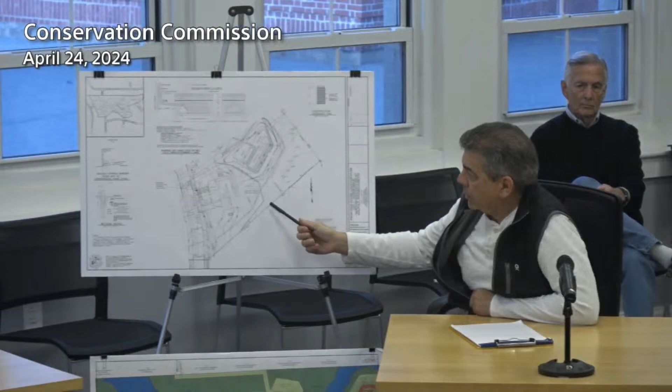So this is Lot 1. We did an RDA on this, and the reason being you can see the wetlands out in the back here. There's a drainage basin for the subdivision on the back of this lot with an easement, and the 100-foot buffer comes up through the basin and around the backyard. The house is outside the 100-foot buffer. This is the proposed dwelling, with the driveway out the front showing a riprap entrance for the construction entrance. There's very little activity back here, and some of this will be cleared when they build the actual basin, so I felt an RDA on this one was sufficient.

We have some roof recharge shown, sized for 1 inch of runoff over the roof area, which is just over 2,500 square feet—a pretty sizable footprint. These are all 35 by 72 boxes, so anything outside of that would require coming back for an amendment, a new notice of intent, or a new RDA. When speaking with the developer, we felt that box was sufficient to fit most of the houses they would consider building. It's all serviced by town water and town sewer.

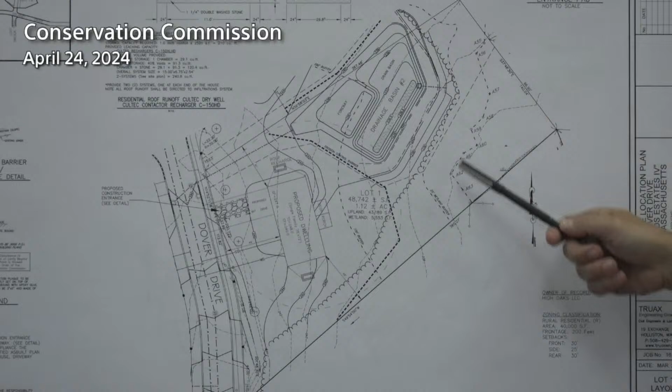There's really not much going on. Obviously there'll be some clearing already done before they get to this lot for the roadway, and like I said, we do have the basin back here. We show the erosion control. The one thing I didn't show is wetland bounds, only because we're putting them in for the subdivision around the basin—I don't actually have them on here. I don't know if you wanted to see anything else, maybe up in here, I'm not sure, but I really didn't show any on this particular site.

But that's pretty much it. Pretty quick overview. Okay, Dennis?

Yeah, I just have a couple recommendations to probably put on the plan, and these will repeat throughout for some of the talks. I think a note on the plan near the basin, stating that the operation and maintenance plan for Basin 2 is covered under the order of conditions for Northwoods Estates, DEP number 315-1261, so that if it gets pulled for some reason, that information is on the plan.

We'll put it right out in this general area—a note somewhere on the plan—for the O&M maintenance plan for the subdivision, Northwoods Estates, covered under DEP 1261. I can email you the links. That would be perfect if you did email me the language.

And then I'd like to see a note, or have it on the plan, that erosion control shall be established in front of the lot after grading until the site is stabilized. I just noticed with subdivisions there's a time period when the loam is down prior to it being stabilized, and it kind of washes off.

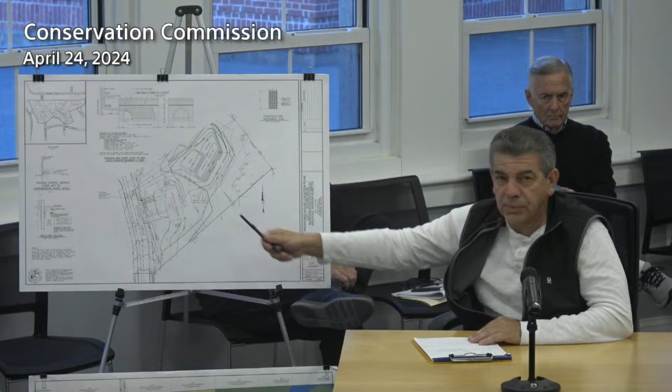I'll look and see what's on the subdivision plan, and if there's nothing coming up here, I'll put some more up here. Even if it's on the subdivision plan, I would put it on this plan too. Show it on this plan also. They should be on the plan that covers the lot. Oh yeah, okay.

Other than that, I would recommend the dash-4. For work in the buffer zone, I can't remember the exact language, but I don't know if it's new or not. The work is within the buffer zone and will not require a notice of intent unless needed, something like that. I don't have the exact language.

I don't think I've ever heard anyone say a dash-4. I usually use 1, 2, or 3, but I was reading it the other day and it sounded like it applied. If there's wetlands on a lot but you're not working within the buffer zone, that's applicable, but further activity down the road could require filing a notice of intent. So that's what the 4 is for.

Medio asked: the drainage basin, is there going to be any sort of fencing or something needed? We're not fencing them in, no. They're open, there's no fall, they're not very deep. I think this one goes from about 236.5 to 243.5, so the water depth, even in a 100-year storm, will only be 2.5 feet.

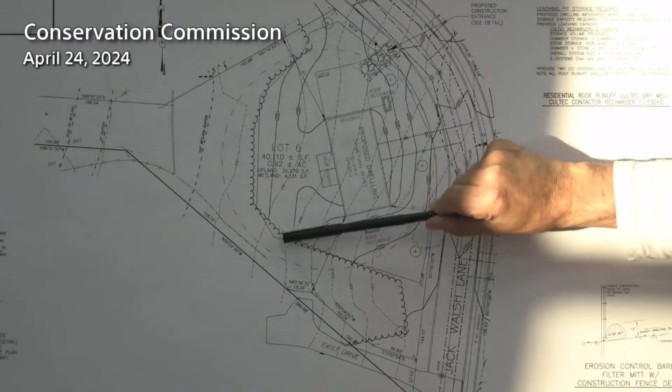Yeah, the wetland has a 25-foot buffer. This is the 100-foot buffer. And this is actually the limit of work that we're showing on the plan, so there's no work within the 100-foot buffer.

Be pretty far out there, over 100 feet from the edge of clearing until you hit any bounds. They'd have to really push the limit to get out there and do disturbance. And the lot does narrow back there, it's a real narrow strip that goes back, 50 feet wide.

And there's a stone wall right here on the site. Probably remember there's a stone wall kind of just after the 100-foot buffer. So most people probably living there will think that wall is some type of demarcation.

Questions, anything else? Okay, Landis? So none of the work is in the buffer zone, all of it is outside the buffer zone. There are wetlands on the lot way far to the rear, and it's pretty thick wooded between - well, not thick, not like underbrush thick, you can walk through there pretty easily. Right, I think in my report I just kind of questioned if the commission wanted to put bounds out there.

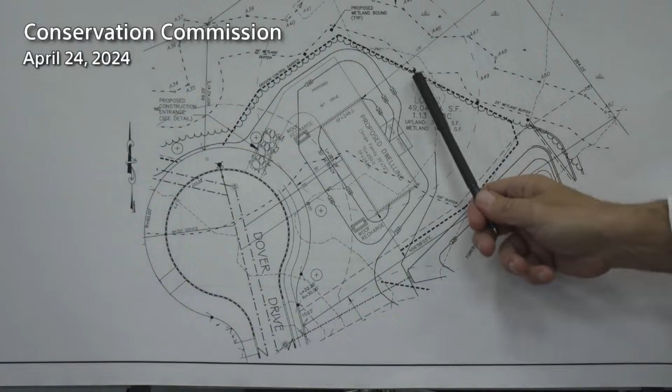Wetlands along the back. This is the 25-foot no disturb, kind of meandering along the erosion control line. We've got some bounds going all along the back side here along the 25-foot buffer.

I did run the erosion control up along to protect the drainage basin, because my assumption is that by the time they build this house, this will be all built and vegetated, so we want to protect that from erosion going down into the basin.

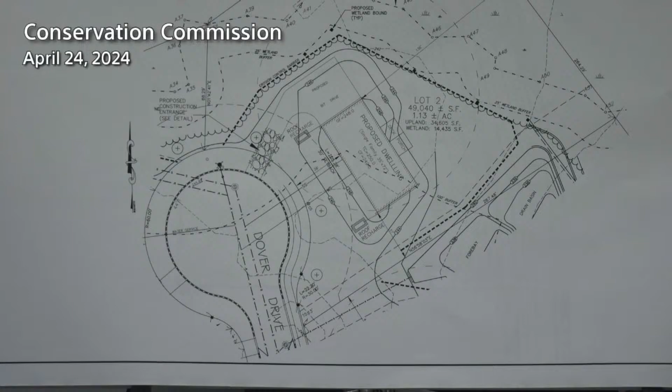That's pretty much it. We have the recharge system for the roof, it's in the front yard. Each house, we basically split the recharge system into 2 systems, one on each end of the house to simplify it. And again, that's sized for 1 inch of runoff over the impervious roof area.

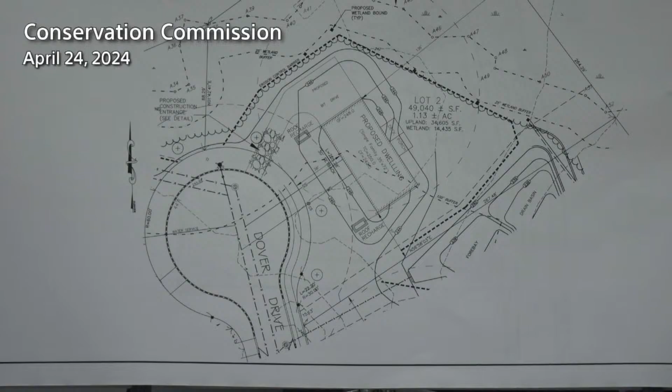And that's pretty much a summary of what's going on. I can answer some questions. Okay, Landis? I didn't have any specific comments related to this lot.

Do we need anything in the report on this that will show that this will handle the 1-inch? Right, so where is that going? Under lot 2 are recommended conditions for all the lots that are notice of intent. Okay, so you want me to go over them now? We can do them for all the lots at once.

So other than the boilerplate we usually put in: the soils at the roof runoff units shall be confirmed to the Conservation Commission to be sufficient to infiltrate the first 1 inch from the roof drainage. I know you have the specs on the plan, but we want to make sure the soils can also take the infiltration. So that needs to be evaluated during construction. You can come out and witness it while we're building. Okay, yep, that's fine.

Roof drainage units shall be located 2 feet above the groundwater and maintained in perpetuity. I think you have it at 12 inches. You don't state on the plan that it's above groundwater because I don't have any testing there, but the water table in this area was very high, like 24, 30 inches. That's why I did the shallow chambers. If you look, those are only 18-inch deep chambers. I did the shallow ones because of that. I didn't do the deep ones.

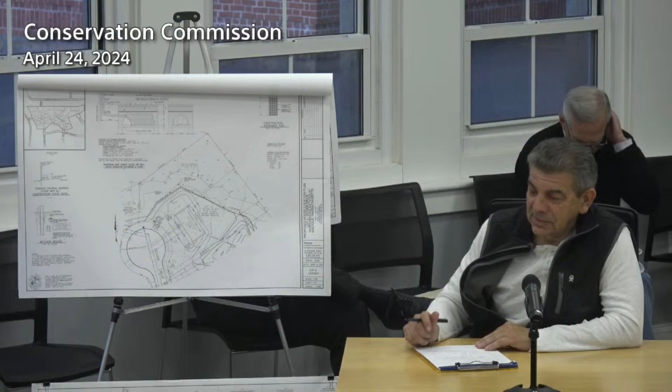Doug, you mentioned the other house was connected to the town sewer. Yeah, this is too. So no septic systems involved - no septics on any of these lots. They're all town sewer, town water.

All right, that's it. Media? No questions? Al? No questions. That's it? No comment. Anyone in the audience have any questions or comments?

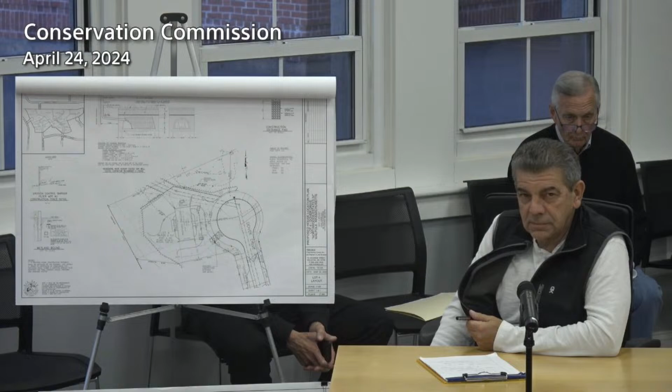Where is Lot 4 on your locus map? So you come up Dover Drive, it's the one on the left. Okay, look at your locus map. Yeah, actually you got the wrong locus map, I guess. That one up there? Oh, you know what - ours is cut off. That's that white strip, can't see it. White line went through yours, you don't have a Lot 4? No, that's the ghost - so we're...

All right, what is that, all? So you don't even have the bounds. Okay, yeah, all right. This is all gone? Yeah, that's crazy, I know, I'm trying to draw it in. Like, I think it's like this. We'll give you all new ones for the file. You got them in email, they must look better on the email.

I was doing the review, looking at the email, and then I started looking at the plans, and something is missing here. These are the ones from the email, no wait, yeah, these ones. Right, yeah, it was the copying, the copy machine.

So you didn't have any other comments? Same, no other comments apply to this particular one. Okay, Bailey?

Broken record, but feeding off your comments, I'd recommend some more bounds at the property lines. There's gonna be one right here. Yeah, I was putting it on the plan, and one on the other side as well, going up here. Where am I? Oh, over here, somewhere. Perfect, that's it, thank you.

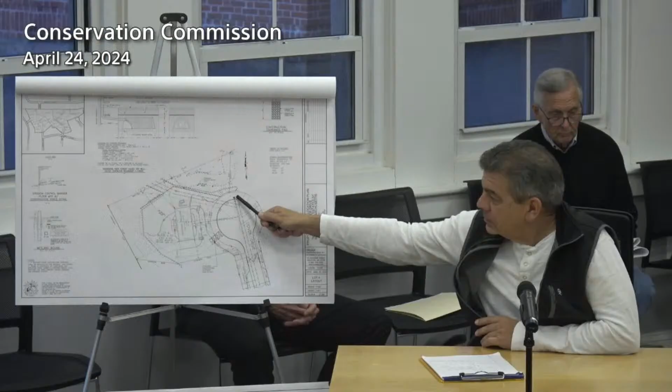Right there, yep. Are there storm drains on the street? They're down here more, this is all flowing this way. So if the fire department was flushing the hydrant, it would flow toward the storm drain, away from the wetlands, correct? Okay, yep, that was my only question.

Media? Nothing. Al? No. Betsy? No. Anyone in the audience have any questions or comments, please identify yourself for the record. This is lot 4.

Okay, so we'll make a motion to close the hearing. So moved. Second. All in favor? Aye.

And the order, as we stated before, with the bounds added as noted in discussion.

Anybody have anything else? So we'll make a motion for the notice. Want to make a motion now? So moved. Second. All in favor? Aye. Okay, this is lot 4, whether it shows up or not.

All your plans are like that, everyone? Yeah. That's crazy, didn't even notice that when we printed them, I guess you make so many copies you don't even notice. No, look, I don't think I did this one right.

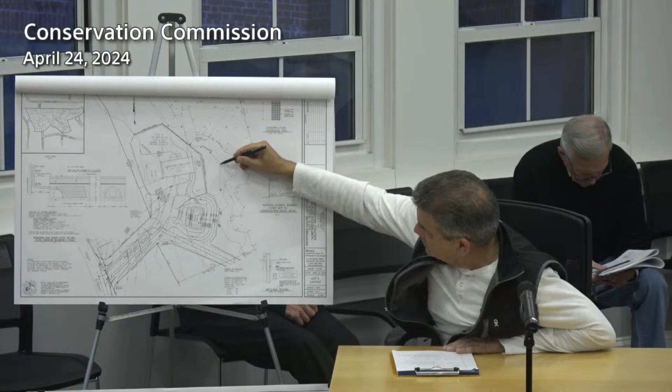The one right there? Where's the, another one up here? Where do you want it, Landis? Like intersect this, where? Like a straight line, where Landis shown? I can't, yeah, well, all right, he's far away. I think like somewhere around one in here, okay. Just one? Right, yeah, coming over.

We're back down to the one you've already got there, I got a 22 flag. All right, so one there, you wanna go out there, we'll put one, just come straight across. Yeah, I think we'll put one up here, then we've got one there. Okay, so that's, I was gonna straight line it like this and put it right out, so it intersects wherever, roughly, we want it in, as long as it's inside the 20, as long as it's on the uphill side of the 25-foot no disturb.

Sure, no, I'm good with that. Like 1, 2, put it right here. 3 more plaques. So we got 1, 2, 3, 4, including the corner property line, which is already shown on one of the other plans, so.

What about going north? Now, what do we got up here? And we'll go way back. I don't show the whole lot. Yeah, I would think another one. Is that property line off this plan? Yeah, it is, I think it is. Well, just put one.

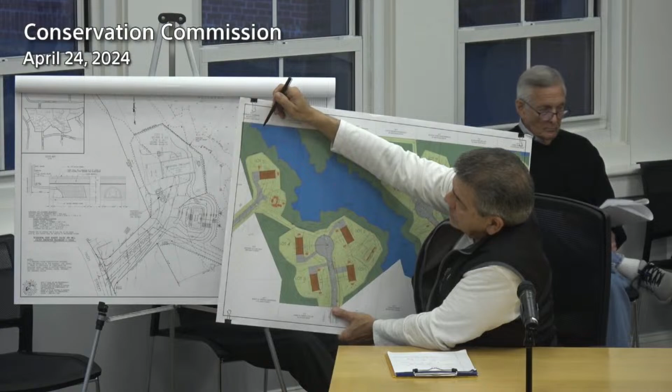You wanna go up just one more, or? It goes up, yeah, this is the lot, so it goes way up here. Okay, but the wetlands up there. Just put one up, near where the border of the plant here is. Yeah, up in there, okay.

All right? And we don't have anything on the west side, okay? I'm gonna start selling. So that's, we've got the plaques in, all right. Anything else, Landis? No, I don't have any other additional comments.

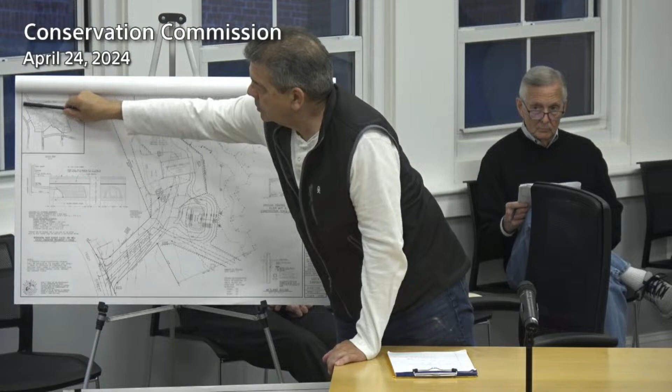Okay, Bailey? What's back up in there? Woods. Just woods? But, well, there's houses on High Street, their backyards come down towards that. I can't really show you on this, but this is a lot here, over here, so these are all houses up here, and this house is along here. This is all developed, those are all houses. Okay, thank you, that's it. Yeah, it goes all the way up to Homewood. So these are all built, these houses. I think this is their backyard where the wetland starts.

Anything else? No questions from the board. We'd please ask anyone from the audience to use the microphone, sign in, and identify themselves.

I'm Bob Scrant, 483 High Street. My question is about the driveway - what's the width of the driveway coming from High Street? It's at least 20 feet, the fire department required at least 20. We tried to make it only like 12 to 14.

At the planning board it was originally 75 feet, and I protested that and asked for nothing more than 25, but I never heard what the final plan is. So what is the plan? I think it's 20 feet, the fire department minimum requirement. That's my only concern.

Good luck building in that swamp. It is a swamp out there, it's wet - this year it's really wet.

On that road, is that covered under the subdivision plan? Yes, this section of Road A. Will that be done to the end? See this bubble - that's the actual road. It's kind of like a paper street, so that's the right of way. That'll be a private way, it won't be accepted by the town.

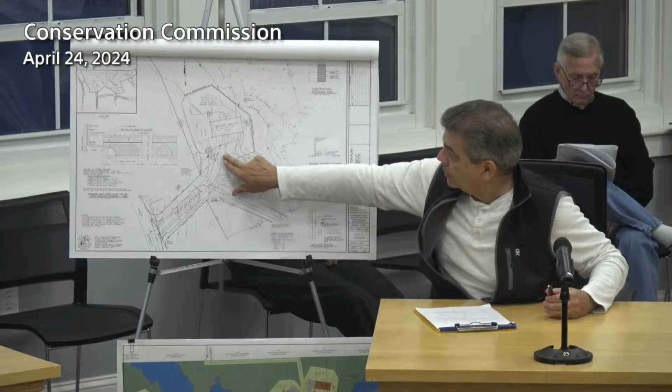There will be a private way there. This is the lot line - that's our frontage for this lot. It comes around the bubble, see it?

The road construction and stormwater are under a separate notice of intent and land disturbance permit. So that's covered as far as how that's gonna be done. We don't need another construction entrance - there's one for the High Street subdivision already on the plan.

So whose lot is the drainage basin on then? It's in the right of way, but it's also on lot 5. They'll be responsible because they're gonna own the road - it's gonna be a private way, so whoever buys this lot gets the rights to this road as well, they'll own it all.

The town's not gonna accept that as a road, ever. That was the deal - we made it smaller, no turnaround, just a hammerhead right here, and he gave up a lot to do that. He thought it was advantageous, I don't know.

So you're gonna build this as part of the subdivision, and then it becomes part of lot 5. Lot 5 will also own that road, but it's also an easement - the town will get an easement for the water and sewer. They'll get an easement over the road for the water and sewer.

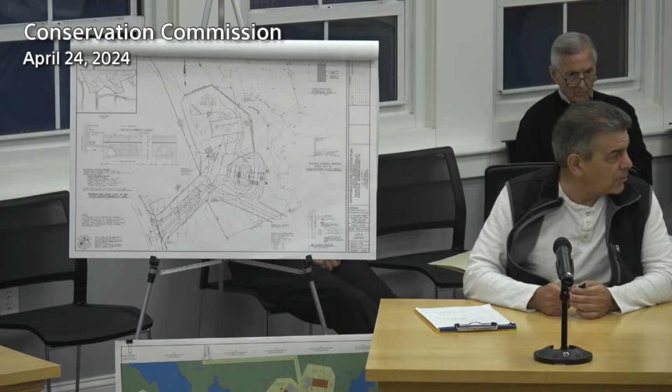Thank you. Can someone make a motion to close the hearing? I'll move. Second. All in favor? Aye. And approve the order of conditions as noted. I'll make that motion. So move. Second. All in favor? Aye.

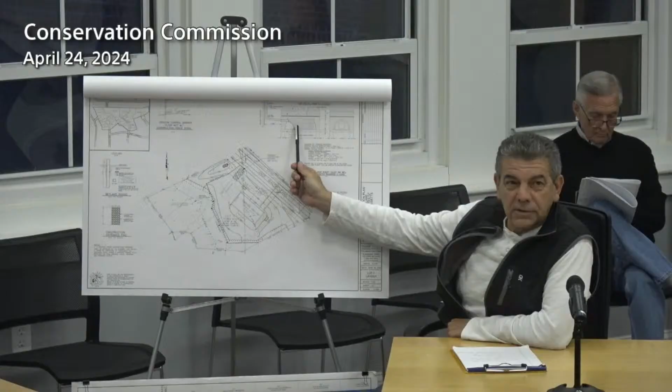I just realized when I was looking, I would include on your plan a note that the culvert should be kept free and clear. Like an O&M thing, same kind of note. Where is the culvert?

This is the area here to the north, the oblong area where the riprap is. That's where we wanted the culvert underneath the road, because when I was out there during the delineation, there was a lot of bleeding occurring at the rock wall on the other side.

So this homeowner should just know that culvert needs to be kept free and clear. I don't remember what language was in the O&M, if any, but I'll put it right on the plan that this culvert needs to be kept free and clear. That should reference the order of conditions.

Do you give individual O&Ms for each lot? With the recharge systems, like gutter cleaning and all, like I normally do, the standard one. Would that be in the notice of intent, in one of the individual filings? You have one of the full notices there?

Note 1: a stone construction entrance shall be installed at roadway, see detail. Number 2: certificate of compliance. Anything else you want to know? No, I've got all the words there, I can read them.

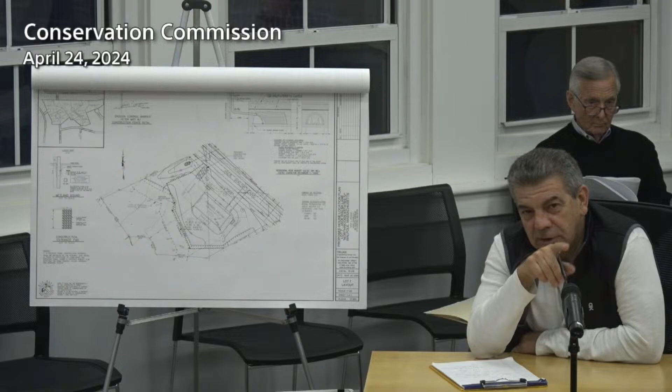In some of these individual lots I put a small O&M in, like a one-pager. I don't remember exactly, but it has gutter cleaning and maintaining the recharge systems. I remember seeing that. Can you put that as a note on the plans?

No, I can give it to you for each one. It's boilerplate, but I can add something specific, like on this one and the one with the drainage basins, we can add that in there as well. And those should be given to the homeowners when they buy the lot.

Why don't we back up to the other ones we already did and put that in? So I'm going to give you an O&M for the homeowners, for the infiltration units. I'm surprised I didn't do that already. Usually it's just gutter cleaning for infiltration systems, that's pretty much it.

But on one like this, lot 7, I can add maintaining the culvert. And on the other one that has a detention basin, I can say you're responsible for the maintenance of the detention basin. We could put a condition that homeowners shall follow the O&M plan for each lot.

I'd probably put that in the subdivision notice of intent, because I've done that on subdivisions before — one for the subdivision, one for the homeowners. Okay, why don't we add it as a condition and you can give me that copy we can reference.

When you make note here about the culvert, just label what it is on the plan, so that somebody looking at it knows what it is, other than just you. Yes, I agree.

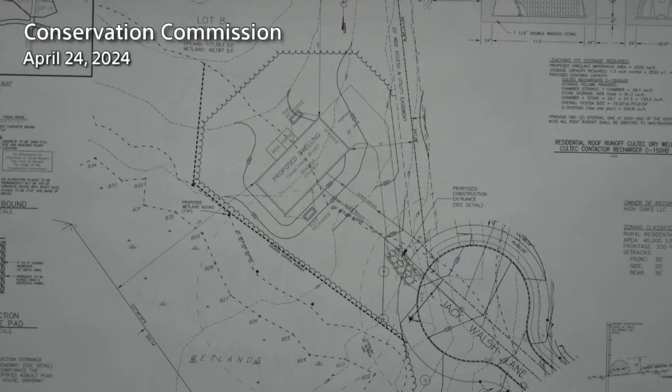I didn't run the bounds all the way out the back. My thought process was, if they go beyond what we're clearing, you're going to probably have some filing in here again, and you're going to require them to run the bounds out the back at that point. If they want to build a barn, a big shed, a big garage, I think they'd be back in front of you for a notice of intent, or at least an RDA, at the very least. So, that's it.

Any questions? Okay, Landis? Yeah, so the limit of clearing to the rear is just at the little squiggly tree line that you have on there? Correct.

And your erosion control just meets the 100 buffer zone because it's aligned to intersect, more or less. Yeah, I just brought it up the hill. I would maybe just hook it around - is that going uphill? It's all going uphill, it's all sloping this way. I just ran it up to the buffer in the woods.

So you might just want to hook it around rather than run the erosion control into the woods that you're not going to be clearing according to this plan. Yeah, I can just do that so it's clear. You want to move this over to here? Yeah, so that'll go here. Okay.

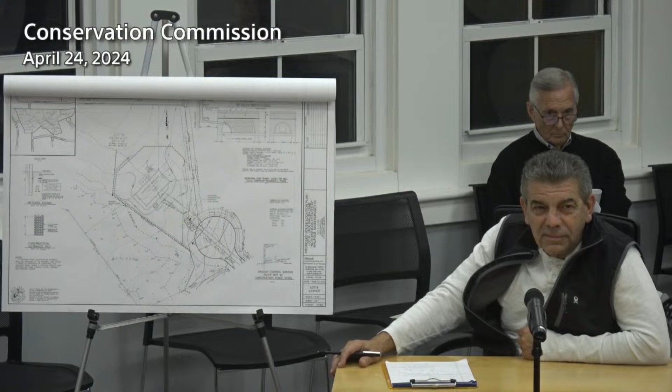Yeah, I think this lot will come back. I mean, they're going to put it out there more or less where it makes sense, but I think this lot will come back, probably with a sports court or something. I can't imagine - I wouldn't buy all that land not to use it.

I think we should, as a condition, require that any development back here will require a filing. Yeah, we have the boilerplate - any additional activity would require a filing, that's pretty standard. All right, that's standard. It's in there as a condition.

Anything else? No, I think that was it. Okay, now.

Those are not plaques. Another plaque down on the south side here. Hey, you took it away from Bailey. He's already stealing my thunder, Al.

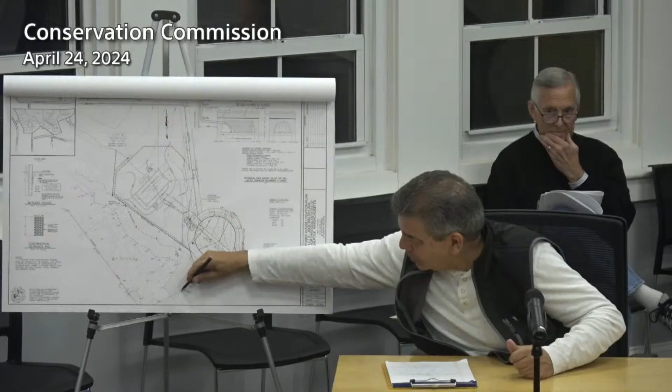Come on, Al, okay. Bailey, where would you and Al like the plaques? Exactly where Al said, please. All right, we've got them all trained. I would say two more plaques on the south, one at the property line. Yeah, I got one, we're going to have one here from the other lot. Okay, well, we'll show it on this one as well. And then one where it makes the bend, someplace in that bend.

Now, do we want to - Bailey, you want to extend any to the west? Not at this time, thank you. Rob's going to order like 100 at this point, so I'm good.

But that's just my - I think it'll come back. Could he put one more out there? Sure, but he's not doing work out there. If you're thinking that this is going to be developed, I think we ought to at least put another plaque out there somewhere. I'll put one more if you want, right here at this little bump, where it jumps out and comes around. Okay, at the westerly end of that bump? Yeah, I'll put one more.

I mean, I do think if someone's buying this lot, they're buying it because of the size of it, and they're going to want to do more. Like you said, they're going to have a sports court or something. Okay, anything else, Bailey? Nope, all set, thank you.

Doug? I'm set. Edie? Al? Okay. Betsy? No comment. Anyone in the audience have any questions or comments, please identify yourself for the record.

Hearing none, so I'll make a motion to close the hearing. So move. Second. All in favor? Aye. 6-0. Order conditions as noted.

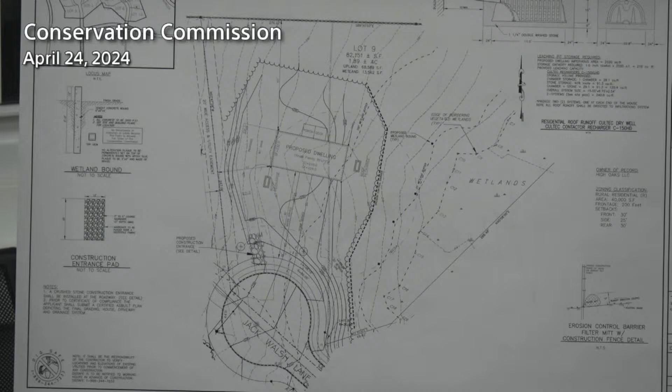So, Landis, I'm recommending a couple more bounds, at least one more. Put one on the corner, on the property line. Wait, which end, south end? C19, down here? Yeah. Right here? Yeah, okay, that's the 25, at the property line.

Where do you want, Bailey? We're not to me yet, it's not my turn. What do we got over here?

Up in there, it gets into the wetlands already, it's in. Okay, Bailey, was there any additional bounds that you would like to see, or anything else?

I could maybe do one more, at the corner at the top, and then it kind of curves in. So maybe up in that area, across from flag C7 -- Landis, see what that is? Yeah, in there, is that all right? C7, okay.

I actually have a question, because there's what looks to be a bound down kind of in the road -- what are they called? Road bounds? Yeah, those are the road bounds. Oh, that is a bound, just not the wetland ones.

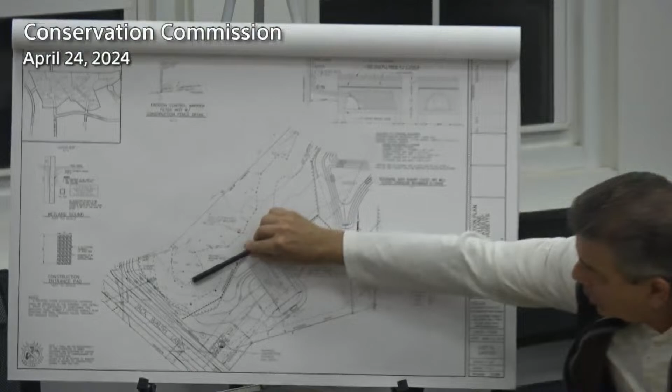Anyway, this is a lot coming in. The house sits pretty far back off the street because it opens up back here. The wetlands are up in the front, all the way along the westerly side of the lot. So we're coming in on the right-hand side, front entrance garage, recharge on either end. There's a drain line that comes down along the right-hand property line, and that goes out to the drainage basin out in the back.

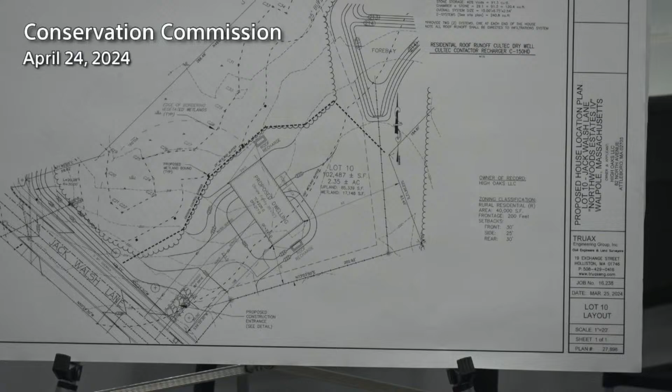We do protect that with erosion controls, because it will be built by the time they build the house. Then we have the 25-foot buffer, we have the bounds along the left side, and the limit of work along the left-hand side of the lot. Water and sewer out to the street. And the 100-foot buffer kind of goes right through the house, eating up most of that lot. Pretty much it.

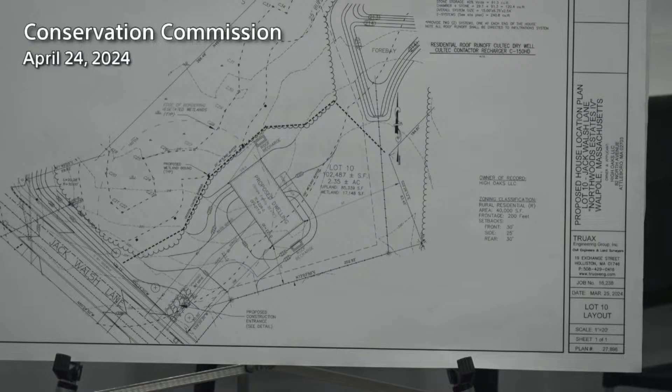So my notes are, again, the operation and maintenance plan for basin, question mark, is covered under the order of conditions for Northwoods Estates, so that should be noted again. And the basin should be labeled with its number, so that we can correspond it to the subdivision plan and the O and M. Yep.

Okay, Bailey, I wouldn't mind seeing a couple more bounds on the roadside, just because some people like to maintain the front of their property, and knowing where they shouldn't go beyond makes some sense to me. Oh, you want one down here? Yeah, because that's the road, right? Yeah. I just didn't think anyone would go down there.

Well, is it going to be cleared, or grass? Yeah, it's just a 3-to-1 slope off the street, drops about 6 to 8 feet. These are all contours, so it goes down 2, 4, 6, 8 feet. So people won't be planting tulips or whatever there. No, just the town, when they need to clean out that culvert. When they go down there to clean it, they're going to see the bounds and respect them. They won't go near them, and they won't clear the slope if they see the bounds.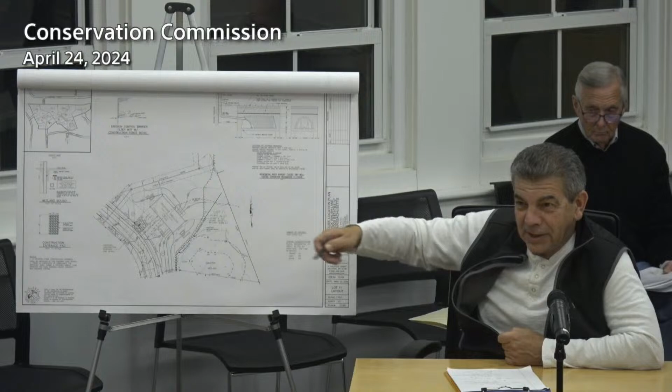So, all right, you put in 3. Yes. Where's your third? I got one in the middle. Oh, I went on either side of the wall instead of one in the middle. I was getting instructions from the other end of the table - I had a few people over here going with that one, so. Okay, so we have 3, 1, 2, 3, okay, 3 bounds.

We're surrounding it. Anything else, Bailey? No. Doug? I'm good. Emilio? Al? No. Betsy? No.

Okay, anyone in the audience have any questions or comments? Please identify yourself for the record. I'm Rick Spellman, I live at 29 Delaney Drive, adjacent to parcel 12. I had a couple of questions. As I look at parcel 12, there are some comments here about temporary sediment basin. Should we actually do parcel 12 first? Well, we're on lot 11 right now. Sorry, did you have any comments on 11? No, I do not. Then why don't you sit there, because we'll be on 12 next. Save yourself getting up and down.

Okay, hearing none, someone make a motion to close the hearing? So moved. Second. All in favor? Aye. And now this is just an order under the bylaw. So someone make that a motion. So moved. Second. All in favor? Aye. Okay.

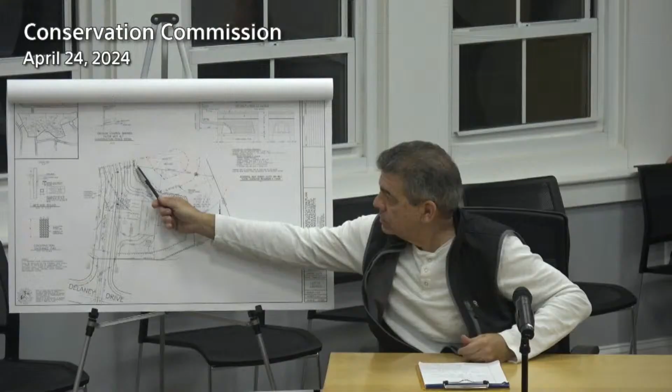Emilio? Al? I'm not seeing a property line on the north end here. This is it here, Al. This, right? Yeah. Oh, you didn't know what it was? Just there, okay, yeah, that's it up there, that's fine. Okay, Betsy? No.

Okay, had a question. On the erosion control, you're showing it in the woods. Is that practical to show it, or should it be along the tree line?

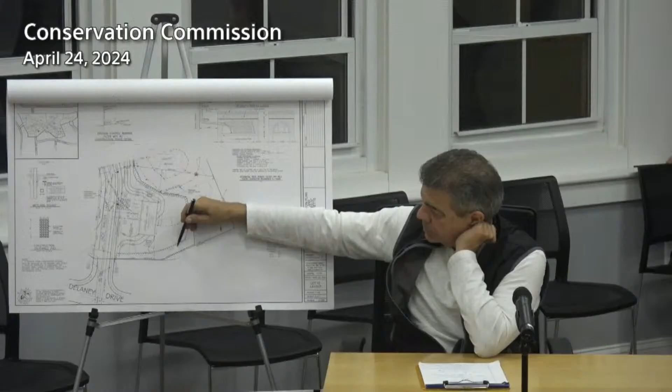You bring it up here more? Well, I just want to know, to get an erosion control line in there, what are they going to do to get there? It's a silt sock, so it's not thick out there per se, they could run it through there. I mean, I can bring it up. I'm actually thinking it should come all the way up to here, at the limit of work. I'm just thinking then it would be more the limit of work, so you leave the trees there. Do that. Yeah, okay.

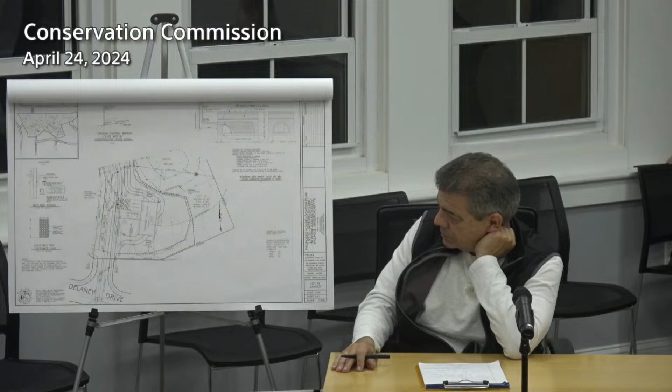Back to Al's comment, the property line is bold here and here, then it goes unbold up there. That's why he was confused - Al's seen billions of plans, so when he sees a thin line he notices it. This is the perimeter of the overall site, so it probably jumped out more than the interior lot lines.

Okay, so we're gonna move the erosion control and bring it all the way down to the road. There's a stone wall there, but we might as well come all the way up. I think we'd had that on there for the subdivision.

You got the subdivision plan in your hand, right? Actually, there is some on there for the subdivision. He's gonna go over that in a second, gentleman right here.

Anything else? So again, identify yourself for the record, please. Richard Spellman, 29 Delaney Drive.

That was my first issue here, is the temporary sediment basin. I don't see that anyplace else on the plan. I'm just curious what that is and how long that'll be there. So that's not on this plan, that's on the subdivision plans that he's looking at, because it's over in this area.

So there's a riprap entrance - the pavement ends here coming off Delaney, that was all built up to this guy's driveway on the left. So then you got the riprap entrance up to here, and then when we were going through the approvals, Carl asked me to put some type of sediment basin here, so if any water did come down and spill off the edge, it wouldn't roll towards his property.

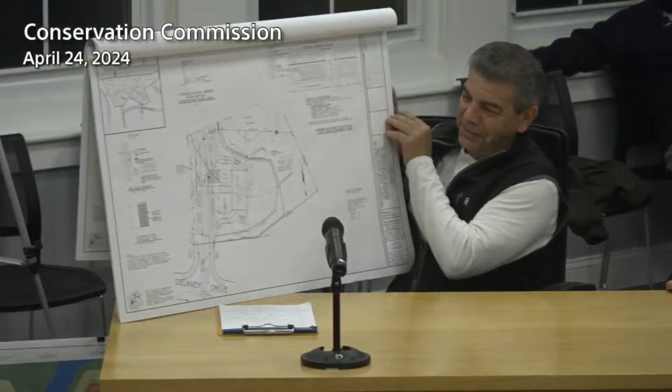Okay, so this is where the temporary basin is for the subdivision. And the hay bales for the subdivision come out here and go up like this and over somewhere in here to go around that basin.

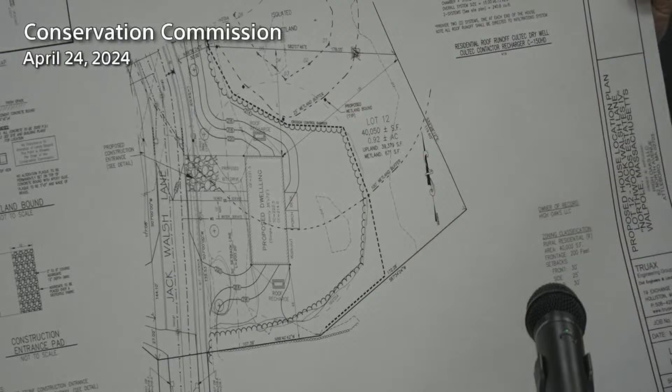So these hay bales are here already. So we're gonna extend it all the way down like this and bring it around that wetland when they build the house - not now, while they're building the road, until someone actually pulls a permit to build the house. Otherwise, the other erosion control will stay there until they're ready to build a house.

Yeah, I was gonna say, that's gonna be delayed, will it not? Correct, this could happen a year or two down the road. Who knows? Okay, very good, thank you.

The only other thing I wanted to mention - the last time I was here was maybe last year, and I related to you that I lived up in the seacoast in New Hampshire for a number of years and had a water problem in my basement. It took a significant amount of money to get it resolved. Subsequent to that, we moved back down here to Massachusetts, and I built this home with the builder and required him to raise the footings up 1.5 to 2 feet above what he normally would do. We also put in a French drain. So in the 24 years I've lived here, in an area obviously troubled with water, the way I see it, if I were shopping here today and saw someone put isolated water wetlands on the property, I wouldn't buy it, and I certainly wouldn't buy it adjacent to where I have to put a storm drain system in the back of my yard. I don't know why anybody would buy that, frankly.

So again, the homeowner is going to be responsible for that, so that's a real question mark in my mind, whether that's going to resolve the problem. But I think I'm okay. I just want to make sure this doesn't adversely affect what I've put money and effort into in a house that I've invested a lot of money into for 24 years.

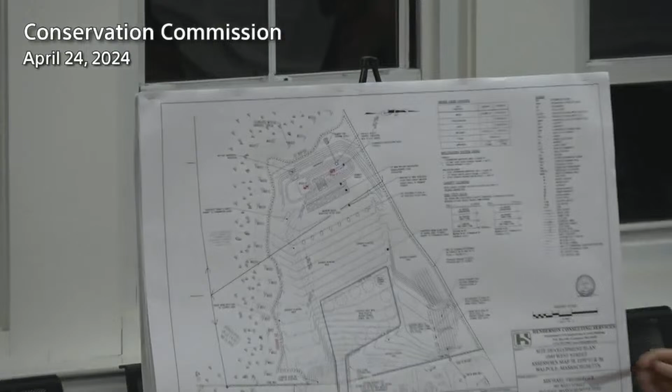The general scheme is about the same. East side of the site is access from the existing nursery. Excuse me, what sheet are you on? Oh, this is sheet 2 of 4, a zoomed-in sheet.

So overall design is generally the same. We have a stormwater basin at the far west end. I have updated calculations that were submitted to Carl. We had some back and forth, and those seem to be settled. So the design and stormwater management is sized to meet all applicable state and local standards.

I'm going to work backwards from the drain basin. We have a riprap infiltration trench upstream of our sediment forebay. Last time that was closer to our gravel storage area here. We flip-flopped that, put in a 50-foot wide vegetated filter strip, and we're calling for a barrier of boulders or stones or something like that to demarcate where the site operation ends and stormwater management begins. This was part of our discussion last time, separating those things and making sure that's maintained properly.

Carl and I talked about that when we were on site, and it made more sense to me after hearing input from both you and Carl to set it up this way.

So from that point back, we have what's called out now as a nursery planting area. The goal here is to use a good amount of this area for Mike to plant nursery stock, maintain it, harvest, ball it, and utilize it, then replant and continue that operation seasonally. So on the plan, left is the south side of our stockpile area, the west side, and the portion not occupied by the septic system will all be used for planting, maintaining, and growing nursery stock.

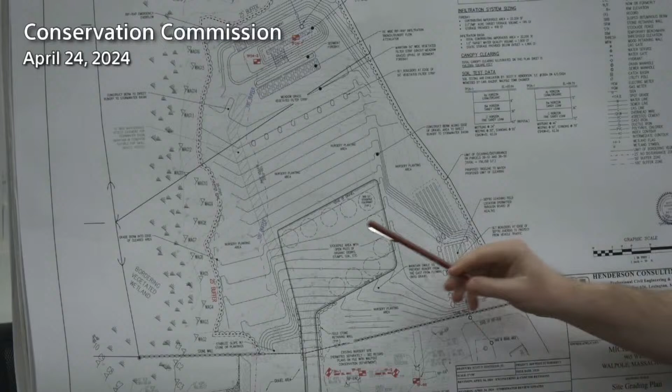Again, sort of marking out general soil stockpiles on here. The intent of that gravel pad is to just be maintained as strictly a gravel pad that Mike can move material as he needs, whether that's planting stock and nursery stock that he's just harvested and preparing to pack and move or sell, bringing in stumps and things like that that are processed into wood chips that are utilized, things like that. So there aren't going to be any structured, constructed storage bins like there are in the other part of the nursery.

This is merely an operational space that's stable enough to run equipment over it.

Other additions to the plan: there was a request to make sure that we put a barrier up between this operation and the septic system. That's been approved by the Board of Health, so we're going to use a similar thing, large boulders or the like. We still have some small stone retaining wall areas here. There's a detail on the last sheet of the site plan that shows that, a typical field stone wall, non-mortared.

You excavate out and compact the base and stack stones in a manner that allows you to keep that stable. The height of that wall is going to be minimized, somewhere between 3 and 5 feet at most, ideally under 4 feet wherever we can, so we don't have to produce a structural plan. And the grading indicates that.

See if there's anything else I missed. That was pretty much it. A lot of this was just adding more information and notation on the plans.

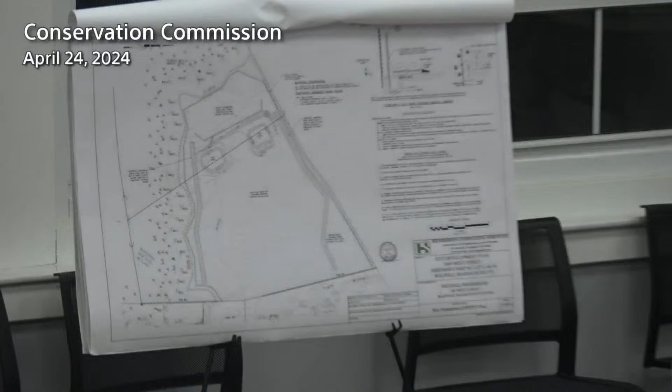I will switch to sheet 3, which is the site preparation plan. We are subject to a NPDES permit. We have an active NPDES construction general permit for the other site, and I have already expanded that to include this area in general, so we have that permit.

One of the things that Carl's initial review requested was that we show construction period sediment basins that can capture 1 inch of runoff from the disturbed area. So what you see here is a general thing. There's no sense in really producing detailed grading for construction period in here because it changes rapidly and frequently. But in general, you berm the edges of the site such that runoff is directed only to the west.

And then the existing topography and what will be proposed sort of splits as you get toward the permanent stormwater area, so we have 2 basins, one on either side. Those are just temporary depressions allowing runoff to collect there when the site's disturbed. During construction, that's adapted as needed, but this will be the first pursuit, to construct the site like this.

When it's cleared and grubbed, then initial grading happens after erosion controls are in. And we want to isolate the area of the permanent stormwater basin, which is why these are located upstream of that, so that we can construct that permanent basin and stabilize everything before you discharge runoff to it.

There's a construction sequence on this plan, and I did just send an updated set of plans today to Landis, so that's what I'm referencing here. The only changes since the initial set was submitted on Monday are the few things that Carl had asked for from a drainage perspective, some updates and details and things like that, so just so you're aware. The details, yeah, the construction detail for the stormwater basin.

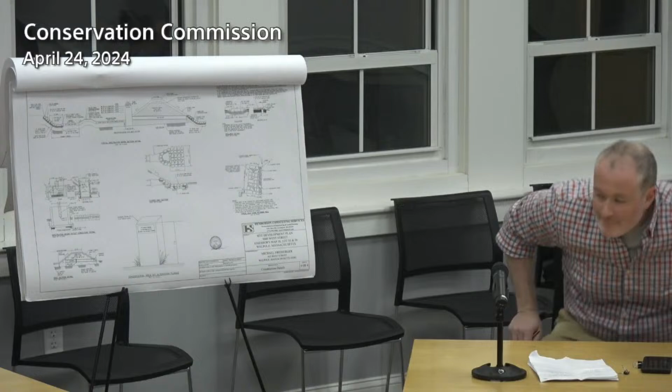So I think Scott did a really thorough job with revising the plans and giving direction of construction, stormwater management to follow, and areas that'll be planted and areas that are for stockpiling. It makes a lot of sense. So that's the redesign of the infiltration basin.

So I provided, so the commission hadn't really seen our boilerplate order or anything for a while, so I put in your packets the recommended order of conditions, which includes boilerplates, and then towards the end, some special conditions pertaining specifically to this site.

One of the things I was thinking about when I was writing this is, one, that we generally limit fertilizers, herbicides, and pesticides in the buffer zone, so the planting areas in the buffer zone would be restricted to that.

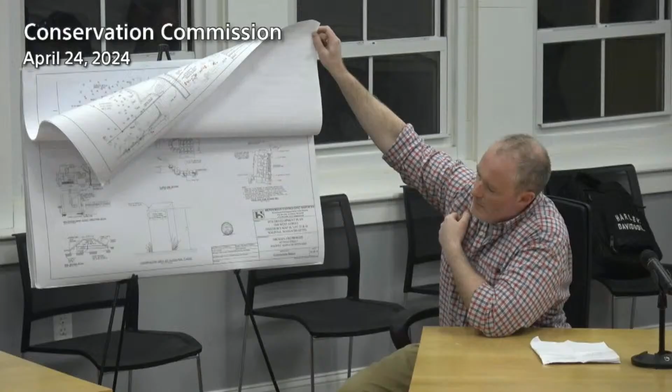And just called for them every 25 feet along that 25-foot no disturb buffer or limit of clearing. Do you want us to show them graphically, so that you can make sure, just squares, add them? Okay, alright, I can do that.

Awesome. And I don't know if we ever talked about it, but just understanding that there's the nursery planting area that borders the 25-foot, within the 100-foot. Are you gonna have like tractors and machinery planting, pulling out plants, or is that all hand done?

Yeah, we use the ball. Usually it's like a spade truck that would come down if it's something bigger. It almost has like a cone shape to it, drops in and picks it up and takes it out. Can you plant smaller stuff within the 100-foot buffer and the bigger stuff outside? Yeah, it just depends on how long you want it to grow and mature before you pull it out.

We could condition that, so not to interrupt, but this area in the 100-foot buffer, it's just this left side. It would be fair to say that you could limit what's grown and harvested in there to not require large equipment to pull it out, because there's so much other area you could put those larger plants. Okay, I was thinking...

If you did want to bring machinery in there, maybe there's more of a physical barrier you could put along that 25-foot buffer so the tractors and things don't accidentally go into the wetlands. But I'm open to, like, a split rail fence or something like that. Yeah, I mean, something. We're gonna maybe do like arborvitaes or something to plant that line.

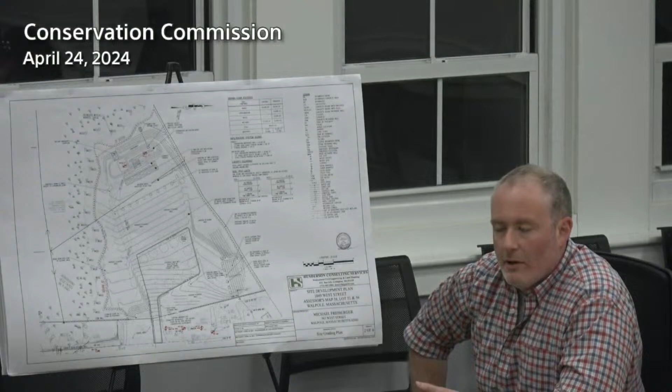But right above the septic field, is that a second septic field? What is that? It's a reserve area, right? So when we design a septic system, you have to have a primary and a reserve. A lot of times you may see a configuration where there are trenches and you alternate, primary, reserve. We didn't do that in this case. So I have it here sort of as a reminder, but it's not being built.

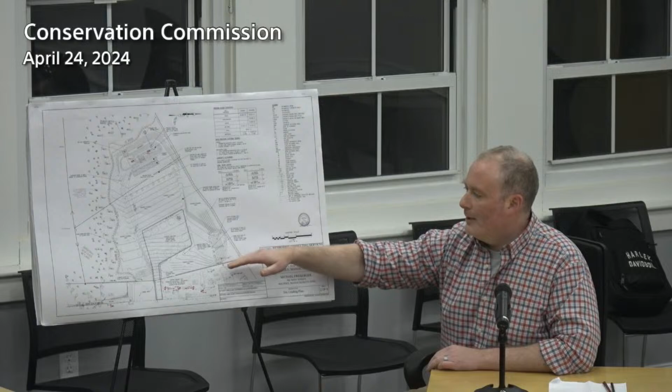Nothing will be built in there. If this ever failed, this is the secondary expansion area, not replacement, right? So it's only if this stops working that we have a second spot that it will work. So we're only protecting what we're constructing. Sure, I understand. Thank you, that's it.

Emilio? When's the proposed start and finish for this project? As soon as we have the permit, I think Mike's ready to go. So it's imminent and ideally completed through the summer season. It shouldn't take that long, so. All right, thank you, that's all.

Al? First question, what is the water supply for this property? It's a well. There's 2 wells. Where is the well? It's on the other land. I don't have it shown here, but there's a well just behind the building. That's your potable one, right? Yep, that's the potable drinking well that serves water to the structure. On this side, there's a second well, and that's an irrigation, a sole irrigation well.

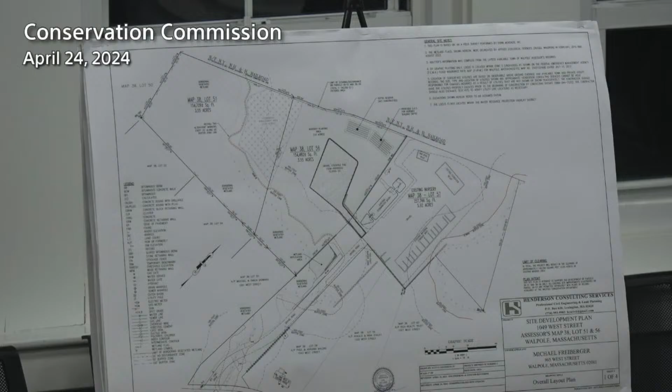Okay, so that's our water supply. All the infrastructure for this is sort of within the purview of the old permit. Okay, so now, since you have well water, and you're gonna be disturbing a large piece of property, my only concern is that if we change the weather pattern that we've been having all winter, and now we get a dry spell, does that well have capacity enough to wet down the place so that you don't generate a dust storm?

So, two answers to that question. That irrigation well has a fairly significant draw. The flow rate up there was, I think, over 10 gallons a minute, which is sizable. 20, when you fracked it. The intent of planting this area so that we have meadow grasses that are left to grow, that are stable, is to stabilize the area so it's not a dust bowl. During construction, we're obliged to have, if needed, water trucks available. If we don't have enough water drawn from the well, we will have dust control provisions on site during construction.

That's my concern, that we could have the other extreme like we had recently, where things get very dry, and I don't want to see a dust bowl here. Understood. Okay, that's all I have, Jack.

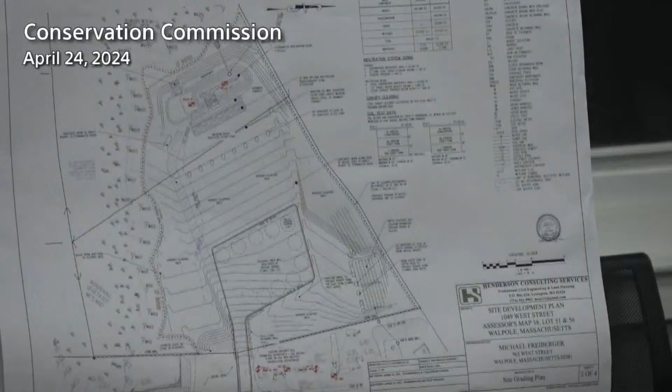Basically, I think if I recall, you said you weren't going to be clearing any of these. My recollection at the last meeting is that the concern was brought up, but I hadn't done soil testing yet down in that area with Carl, and agreed to when we went out there to take a look. There's about 140 feet between our limit of clearing and the opposite edge of the 25-foot notice there, based on record mapping of that wetland area. So there's a sizable vegetated buffer that still remains.

As far as providing planting and screening and sound mitigation, I don't think Mike is averse to doing that. However, the permitting we're talking about now is relative to stormwater in the wetland, not exactly an operational question.

No, I mean, it seems like there is quite a bit of distance between the operation on this application and your abutting property. That doesn't mean Mike's not willing to plant there. My own concern was more that the wetland area vegetation is not evergreen type stuff.

So in the winter it's bare, and that's really when the problem is. It will fill out in the summertime, so it's not as bad. But it's the evergreens, the cedars and pines, any that can be preserved along that line and supplemented with something else. I'm not against them trying to get some space, but it'd be nice to have some kind of barrier year-round.